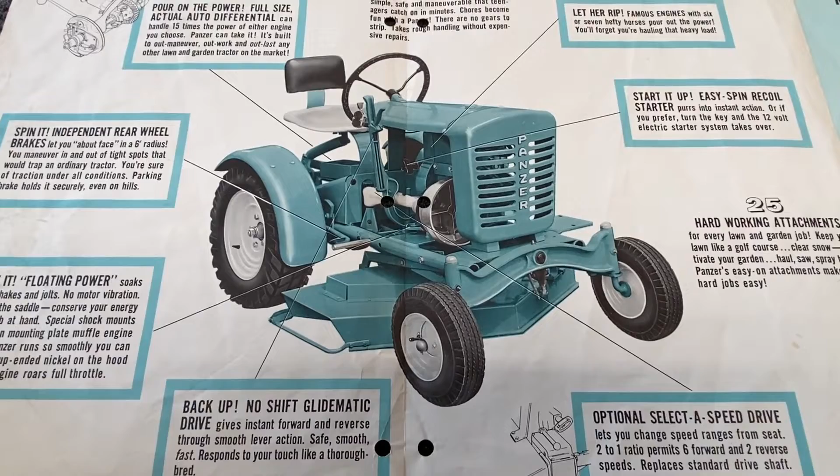Hi, Curtis in Seattle. Today I wanted to show you my 1963 Panzer T70B lawn tractor. I bought this about 22 years ago. Mine looked just like this one with the 6 horsepower Briggs. The only difference is mine didn't have the backrest. Today my tractor looks like this. I'm adding a loader on the front and I'm replacing the fenders and I'm also re-engineering it.

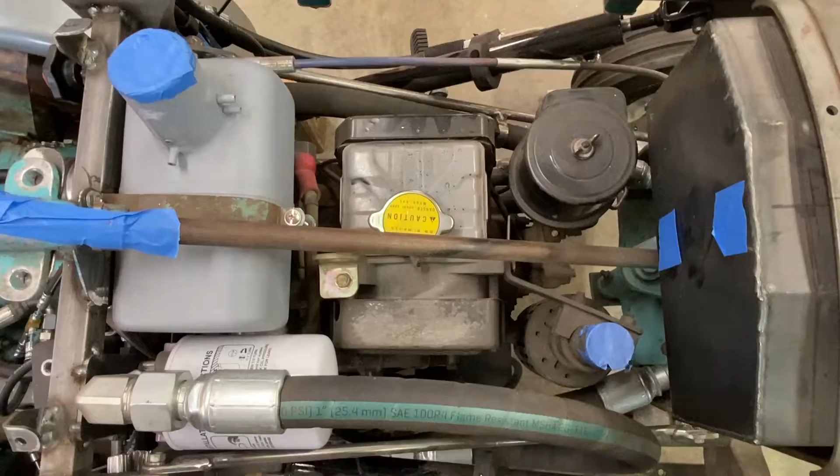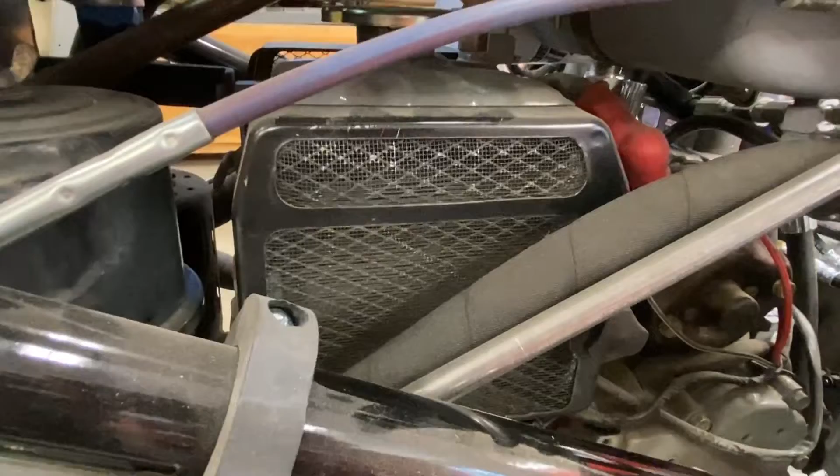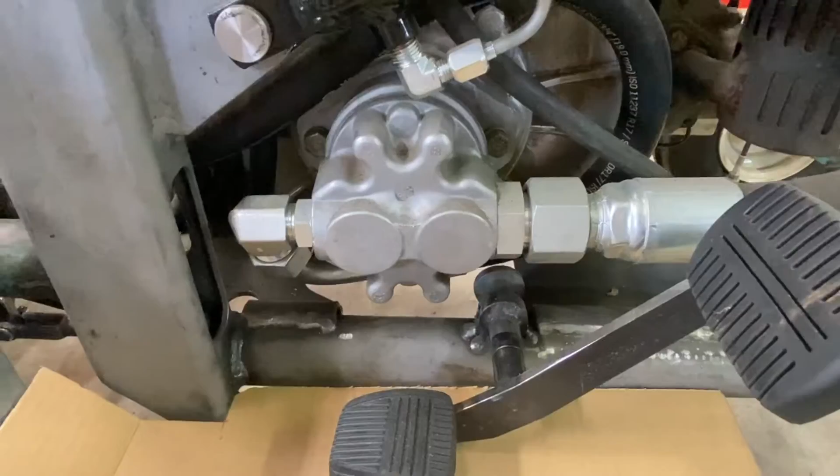Here's the top view of the Kubota EA300. It's a single-cylinder diesel water-cooled engine. Here's a side view of the Kubota diesel engine. The radiator is right there, sits on top of the block. There's no water pump. That's the air cleaner. And there's a compression relief valve there. And then that white knob is prime. Married to it is a hydraulic pump.

I've nested a 2.5 gallon hydraulic tank in the grill, and the fill will be up through the middle of the grill. Had to modify that. I have a 1-inch suction line that runs from the hydraulic tank through a filter, which is kind of down in there, and then down to the pump, and out of the pump is a 3/4 inch line that runs to the spool valve.

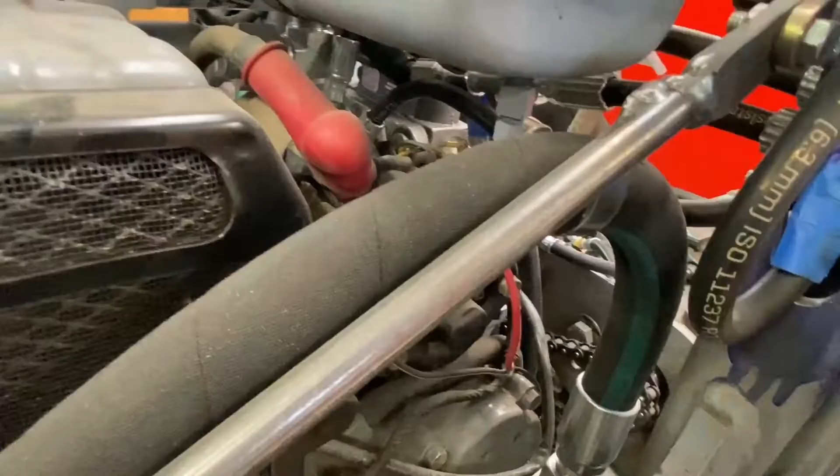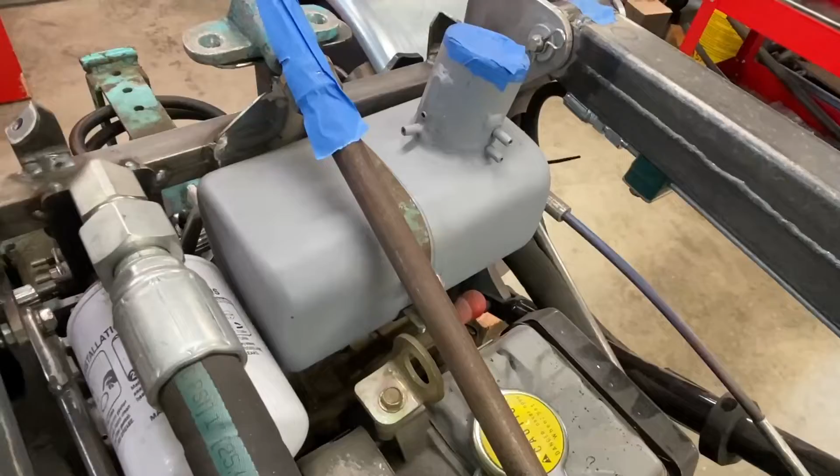This is the forward reverse valve that runs over to a hydraulic motor that's chain drive to the differential, the original differential. The return line is 3/4 inch diameter and it runs along the strut. And then I've got some supports that are welded there to keep it where it needs to be. The original fuel tank is being used for a diesel tank, but it's been moved.

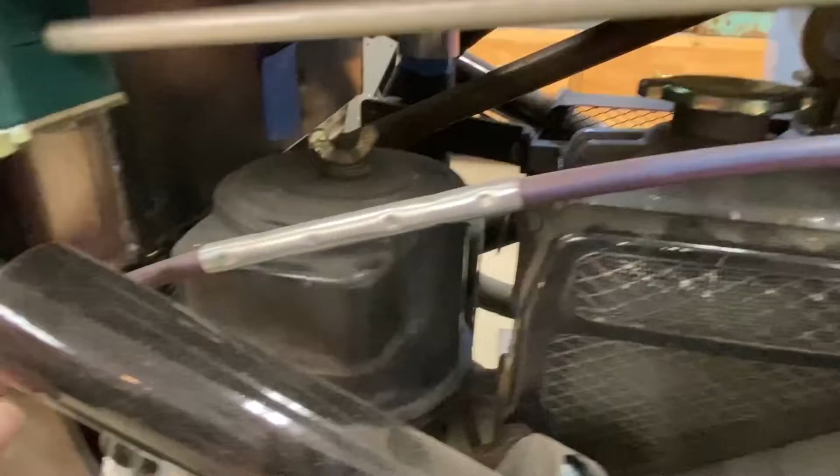When I bought this engine off eBay, it came with this throttle. It was a military surplus engine and it came with a pump, which I didn't use, and the control box. But the throttle, you twist it for fine adjustment and then you push the red knob in and you can pull it in and out for coarse adjustment. It was very, very long and I ended up cutting it, and then I took a 3/8 brake line and staked it over it for a splice here.

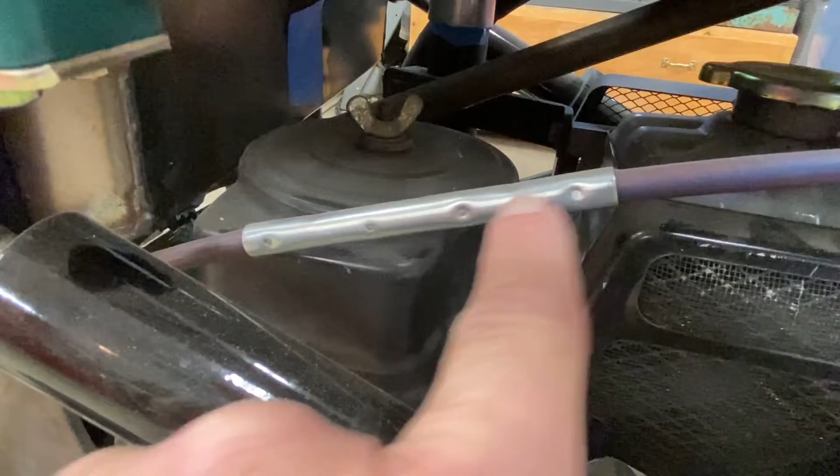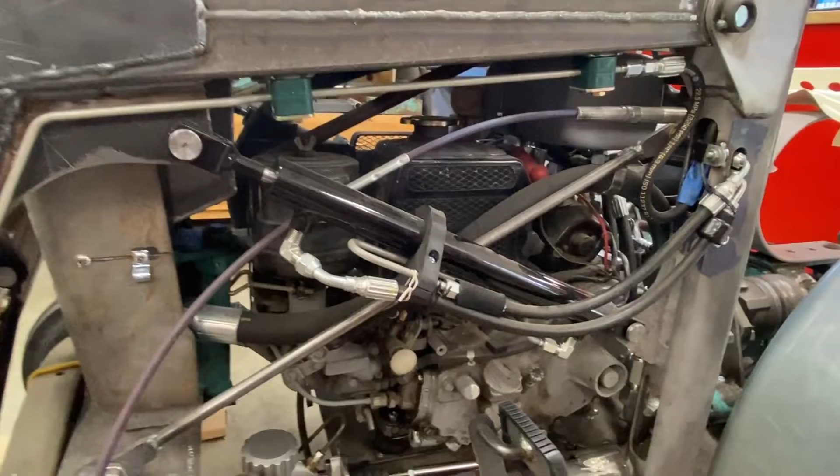So there's my staking. The lift cylinders are double acting 1-inch bore and 1/2 inch rod. This one is 12 inches stroke, and they're capable of handling 1500 PSI, and I did the math and I'm pretty sure that these cylinders should lift about 350 pounds or so. The bucket tilt cylinder is a 10-inch stroke, 1-inch bore with a 1/2 inch rod.

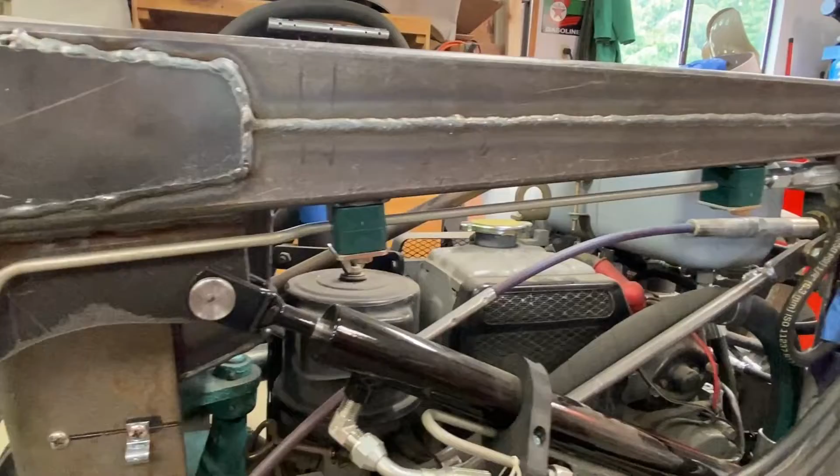And the lines, one runs up one side of the boom, the other on the other side of the boom. And these are 1/4 inch lines that I bent around, and they run along the boom. And then they enter the uprights there. This is the tightest bend that they'll ever have.

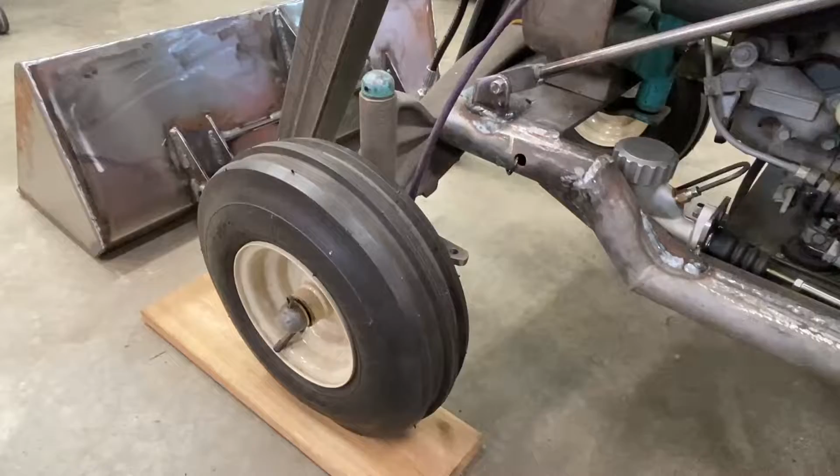I designed and made the bucket. It weighs about 32 pounds. It's 33 inches wide and a foot tall. And I pinned it. It pins pretty well. So I just need to sandblast it and paint it.

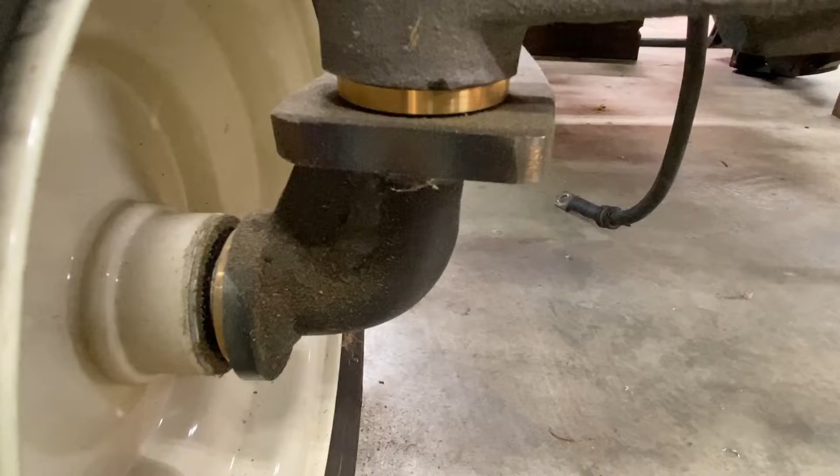I'm reusing the front axle and the original wheels. The spindles are still 3/4 inch diameter. They're the original style of spindle, but I've had them remade with a support gusset that should help with the load.

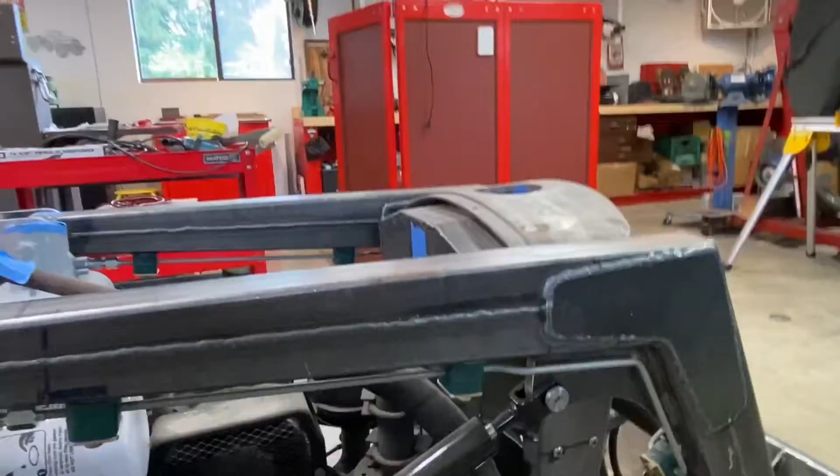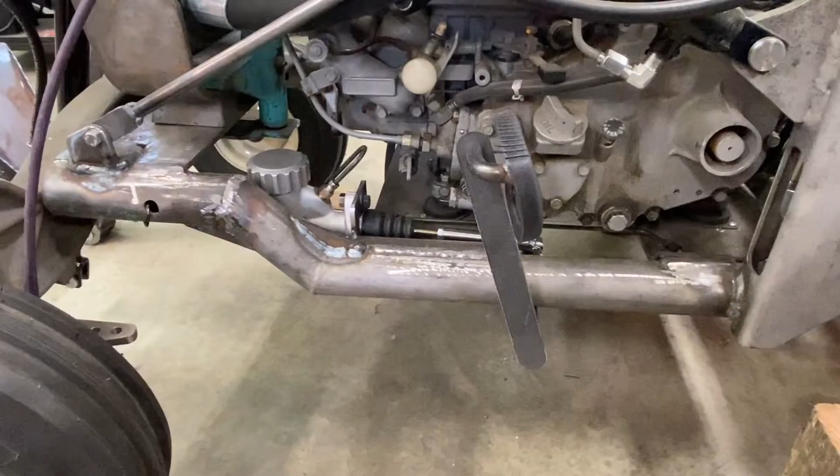The boom is tapered, and this used to be 2-inch by 3-inch box beam. This is 2 inches now by 2 inches. And over here, it's about 4 inches thick. And what I did is I took the box beam and I cut it at a diagonal and then flipped it around and re-welded it back together so that I'd get this tapered look.

I had to drop the frame 3 inches to get the Kubota to fit in so that I could use the original steering geometry. Another view of the original steering gear.

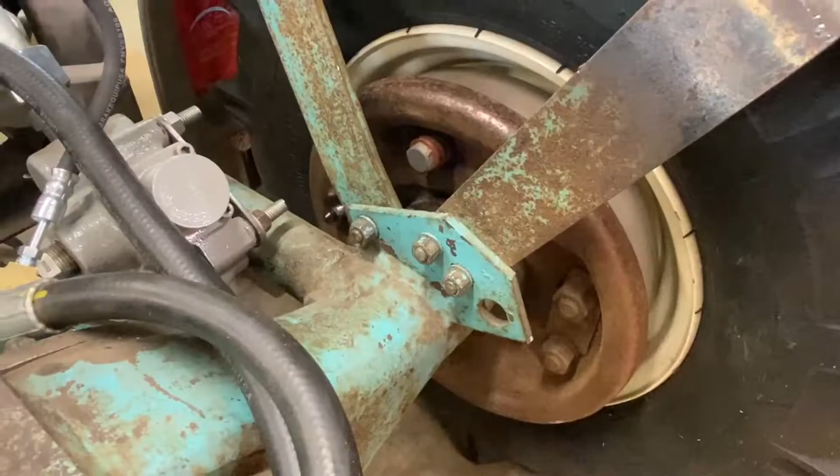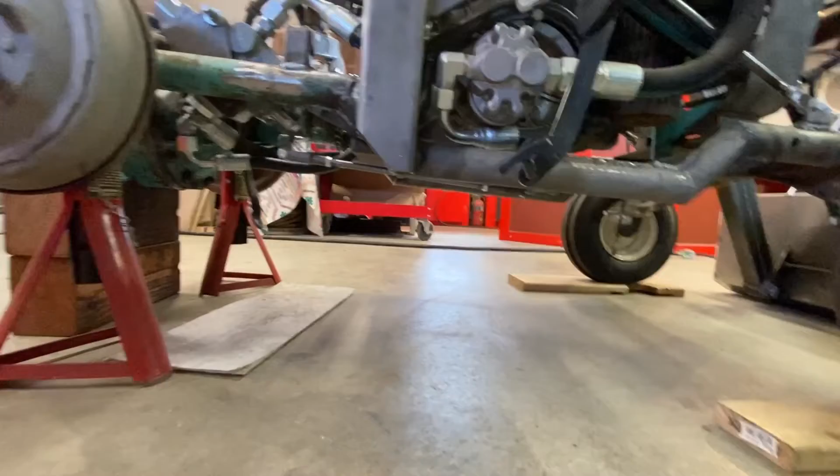I'm replacing the brakes. They used to be a mechanical brake, now a hydraulic brake, and this is a dune buggy master cylinder. I'm hoping that that will actuate both the brakes. I've replaced the brake backing plates with 1954 Belvedere backing plates so that I can put wheel cylinders on so that I can convert it to hydraulics. Well, I got the linkage hooked up. Looks like it works.

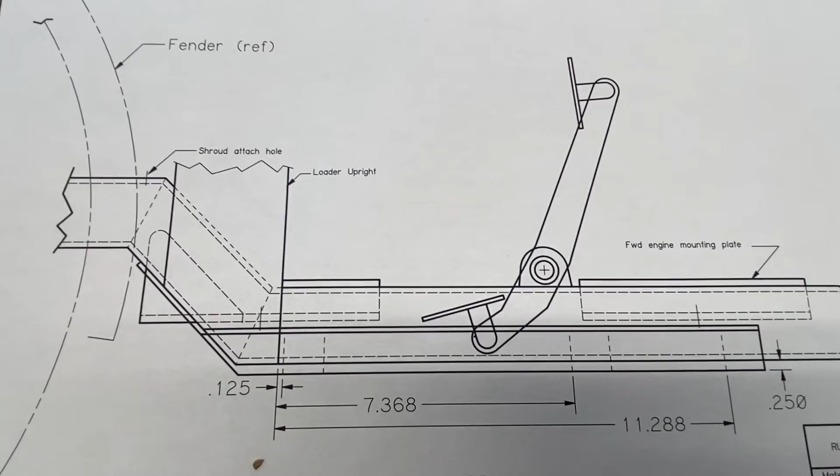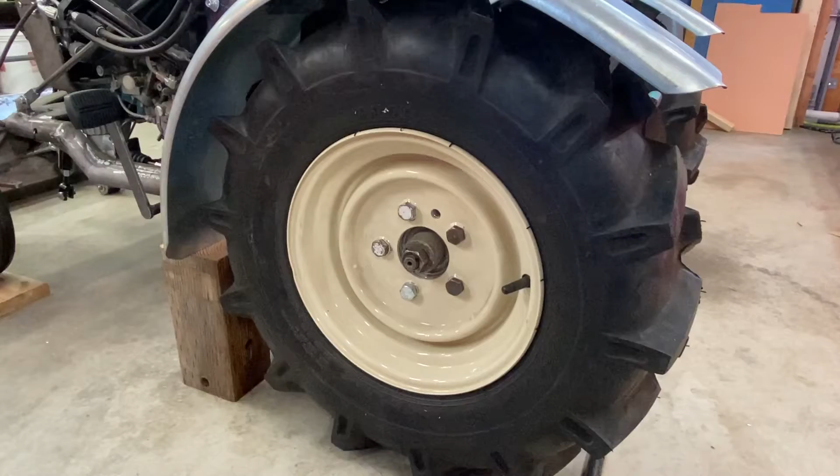Today I'm working on the running boards. This is 1/8" diamond plate, steel diamond plate, and I'm making a mock-up. I pretty much start all of my work on this tractor with some drawings. This is a side view of the installation. You can see the forward reverse pedal there. Here's the support structure. It's all 1" square tubing, and the running board, which looks a lot like that piece of cardboard you saw a few seconds ago.

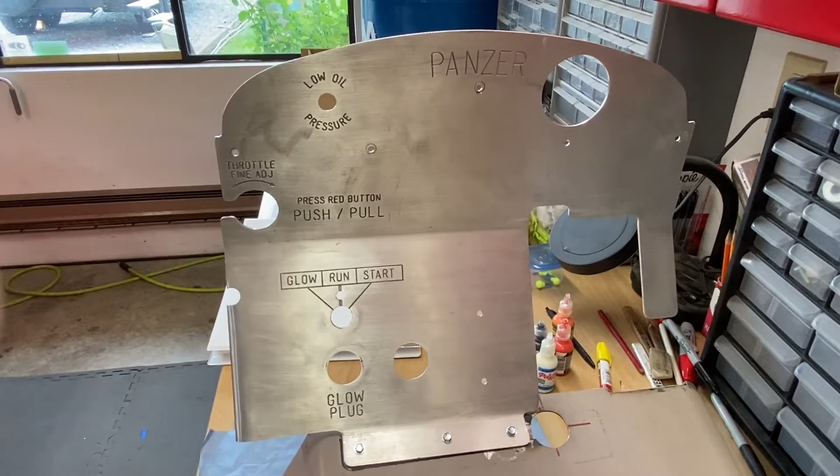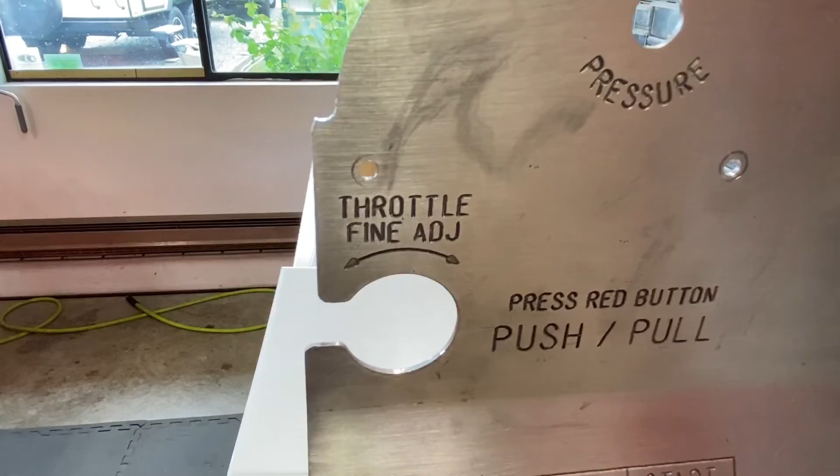I'm keeping the original wheels from the Panzer, just powder coated them. And I'm reusing the shroud, although it's been modified quite a bit to clear the hydraulic motor. And I'm replacing the strut that holds up the hood with this aluminum dashboard that I've had engraved with Panzer.

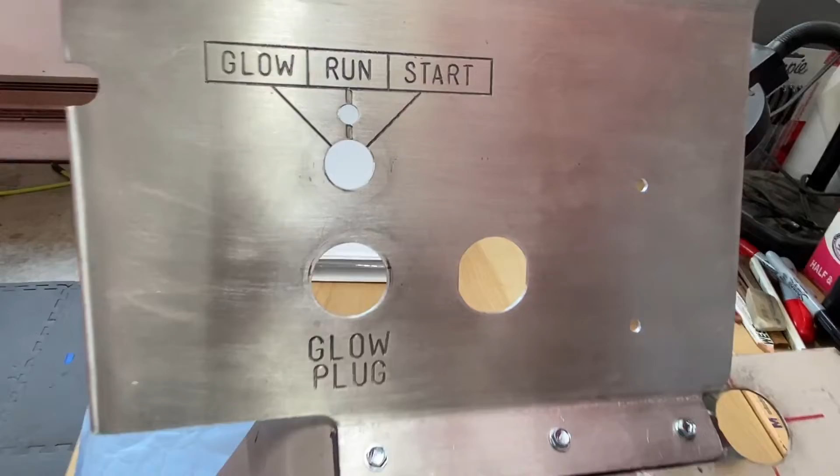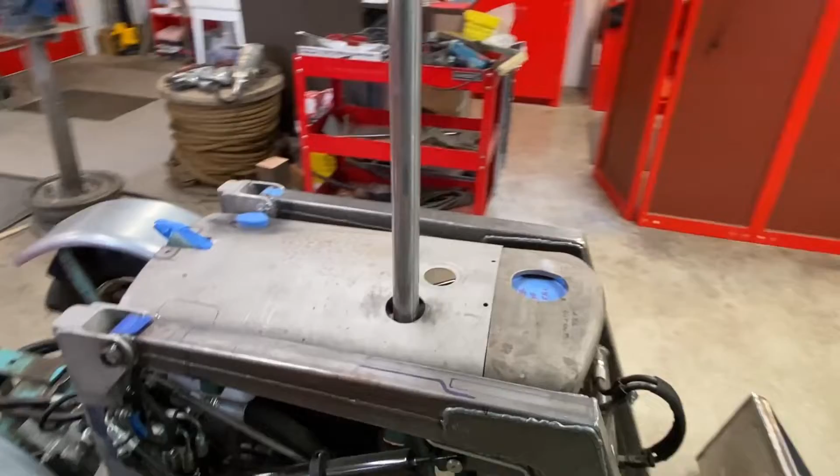There's a low oil pressure light, the throttle. Because it's a diesel, it's got a glow plug. And then the hole to the right here, that's going to be for the voltmeter. This is where the parking brake comes up through. I'll put the hood on just to show you what that's going to look like.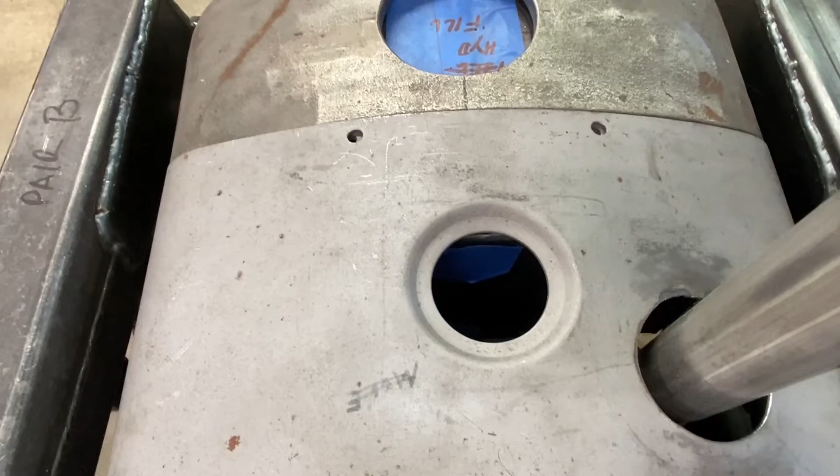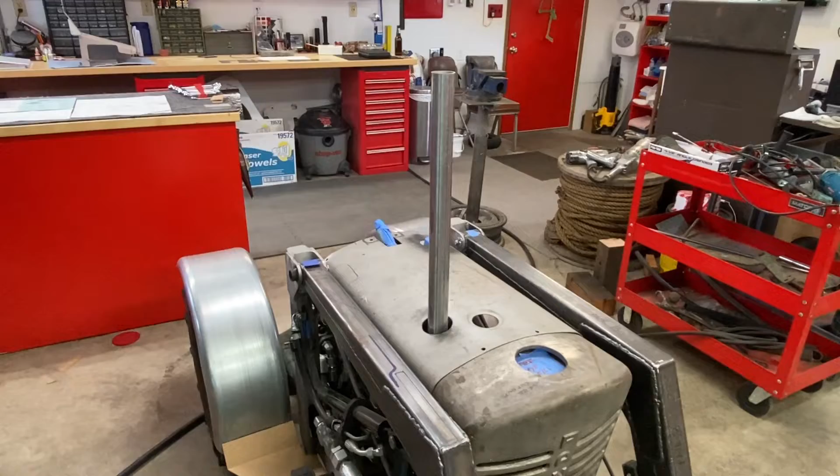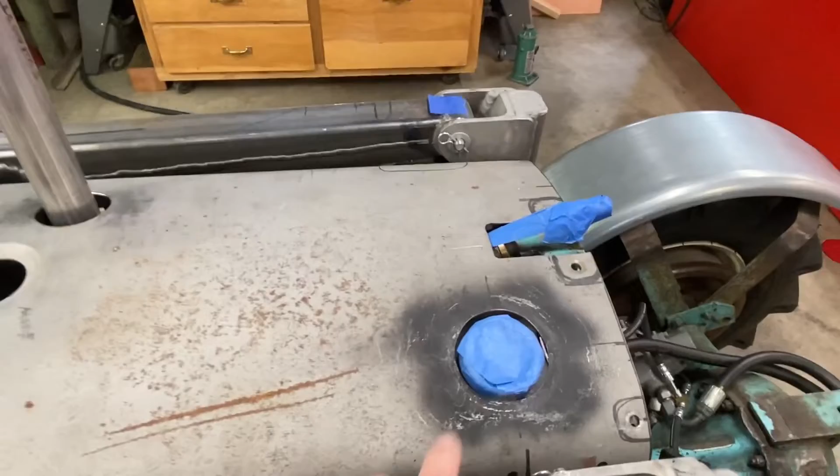This is the original Panzer hood. This is where the gas tank used to come up through. And that hole I'm going to leave so that you can look down and see the sight glass for the hydraulic tank, and there should be a thermometer on that. I'm not sure you're going to be able to read it. And of course there's going to be an exhaust pipe sticking up through, probably a little shorter, and it'll have the original Kubota EB300 flapper on it.

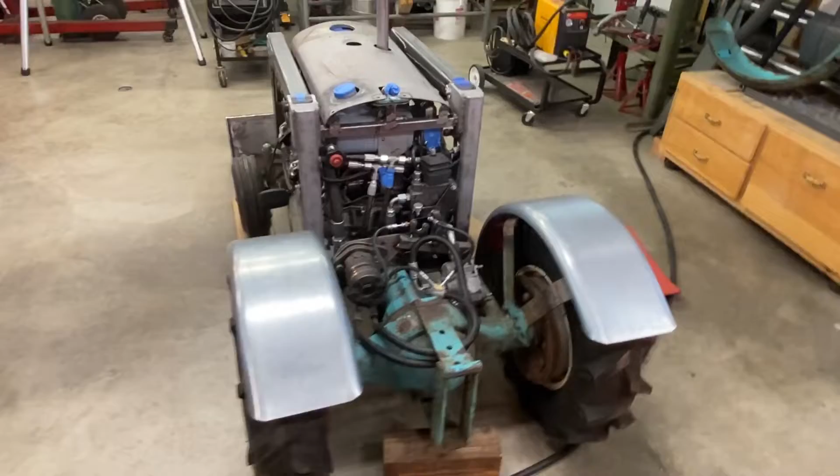And I put an auto style fill for the fuel tank, so it'll have a nice chrome cap on that. And I'll put a picture in that shows the shroud and the dash installed so you can see what those look like.

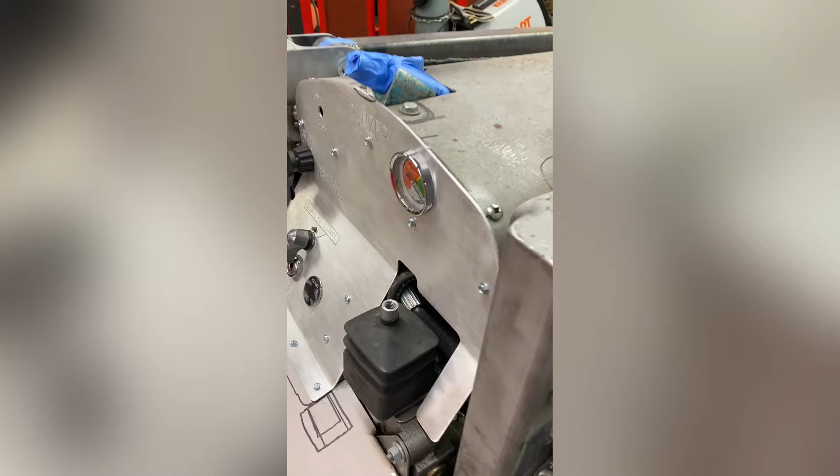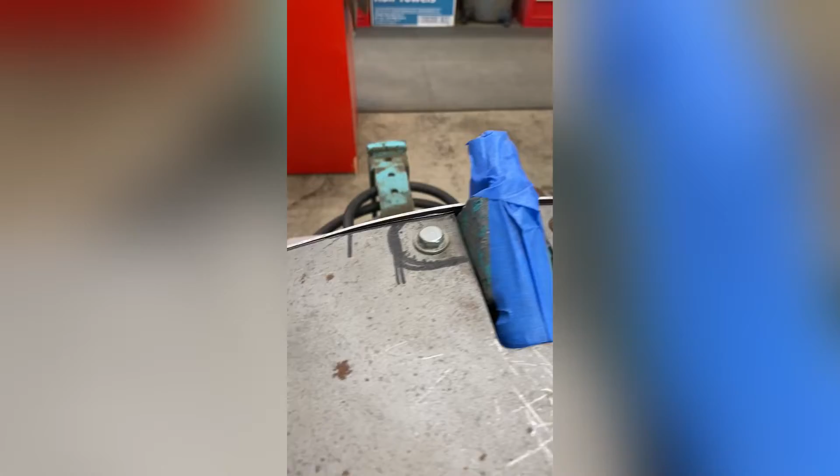So today I was fitting the dash. This is a dash that we formed out of an aluminum I-5 sign that was knocked over. And so today I happened to trim the top of it. It's going to be the final fastener locations. They went together pretty well.

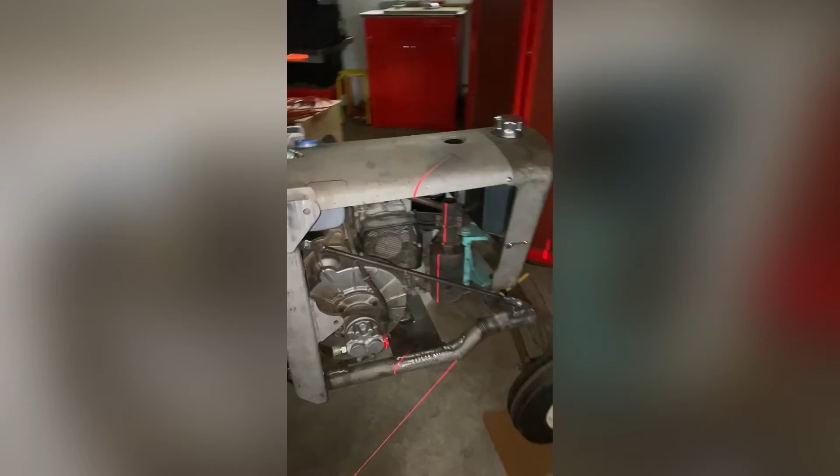So cutting the hole for the exhaust was a lot of fun. I got it pretty well centered. And the way that I did that was I used a laser level. Using my laser level to figure out where the exhaust would penetrate the hood, so I can cut a hole up here for it. Looks like right there where that cross is.

And the laser level worked out pretty good. The only thing I had to do was to shim up the tires 1/4 inch in front and about 1/2 inch in the back to make the exhaust exactly plumb so that this would work. So looks like it's going to be good. I'll cut the hole and take another picture.

I put the seat on and the steering wheel. I wanted to show you the loader joystick here. It's going to be a little tight, especially getting on and off. And I think I'm going to have to rebend it or make a new one. I'd like to make it a little shorter, a little tighter to the steering wheel.